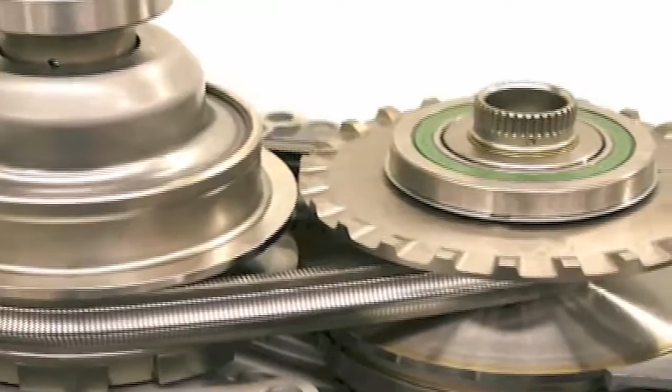CVT belt to pulley clamping. The key to understanding how a CVT works is by reviewing how the chain and cone pulley react with each other. All CVTs have one weak spot, the contact point. This is where there is a tendency for the whole transmission to slip, grind and sustain damage. Incredibly enough, this is not where CVTs fail the most, but more on that later.

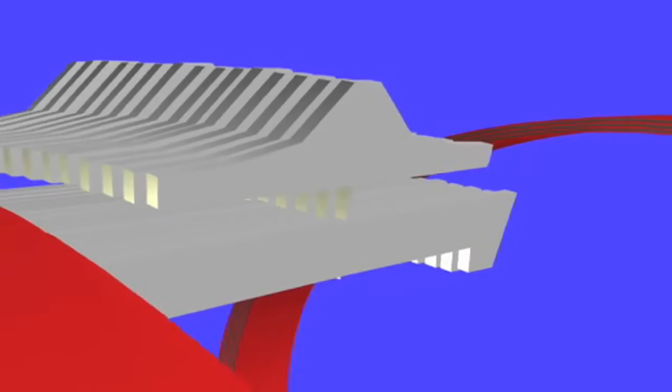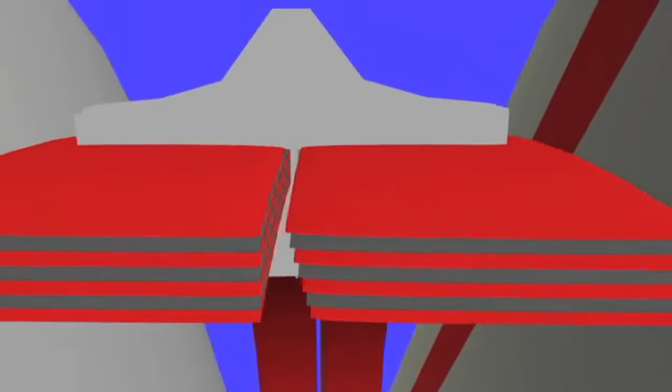The CVT belt is composed of two groups of metal rings, each of 7 to 12 rings, and a few hundred special metal links. It is these links, the ones with direct contact with the cone pulleys, or variators as they're called by the manufacturer. For good clamping force, the CVT needs a specific transmission fluid. To neglect this fact is to ask for trouble, as the CVT will get damaged due to slipping and grinding between the belt links and the cones.

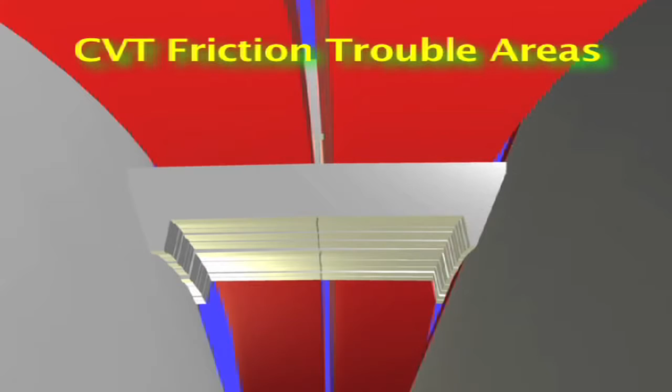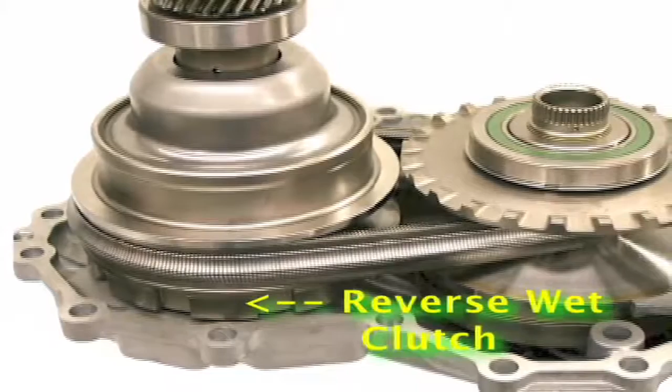The CVT also has a few wet clutches, like a regular automatic transmission, needed for reverse gear. All pressures are regulated by a series of pressure control solenoids, pressure sensors, and a TCM pulse width modulated control signal. Unlike the Honda CVT, most CVTs use a torque converter. Honda does away with the converter, and uses clutches instead. The purpose of the torque converter is to allow constant acceleration from a standstill, by providing a hydraulic disengagement from the engine. After driving away from full stop, the torque converter clutch applies very early, usually at about 14 miles per hour.

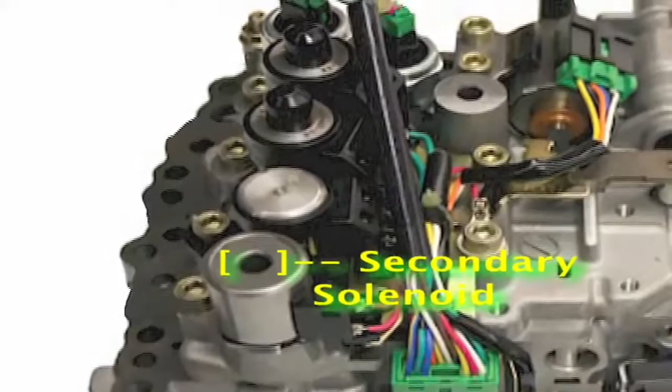The secondary variator pressure control solenoid controls the position of the secondary variator pressure control valve. This valve regulates the release of fluid to the oil pan from the secondary variator or pulley during movement from high to low gear ratio. Since the CVT depends mostly on the secondary variator to provide the necessary clamping force on the belt, it's very important for this solenoid and valve assembly to work properly. A fault with the secondary pressure control solenoid will send the CVT into limp-in mode, precisely so as not to cause damage between the belt links and smooth cone surface.

The following DTCs will set if there's a failure in the secondary variator circuit or valve: DTC P0776, P0777, P0966, and P0967. The TCM will look at the secondary variator pressure sensor value, to determine if the solenoid is operating properly. If the actual values and target value pressures don't match, a DTC will set.

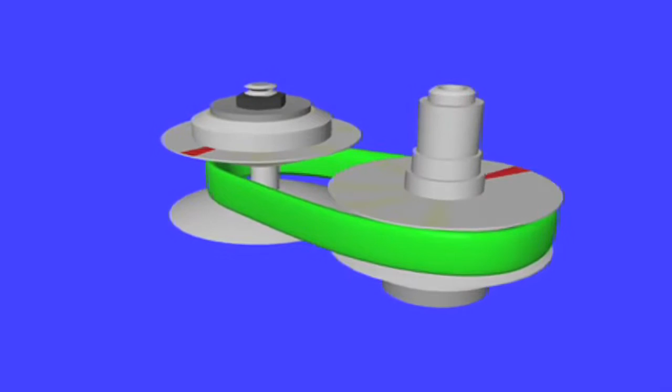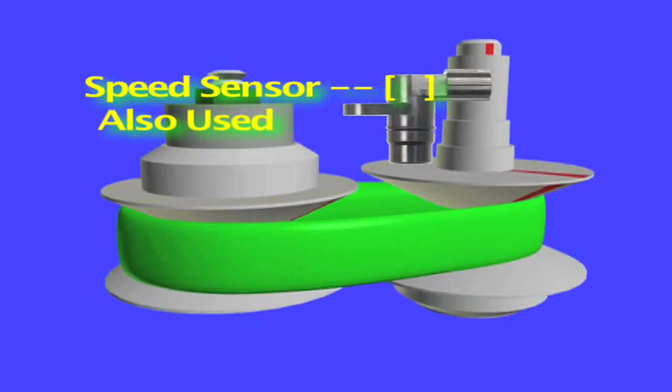Keep in mind that CVTs work by pushing on the belt, and the right tension on it is of absolute importance. How does the TCM know the CVT belt tension? Well, very easy, by monitoring the variator pressure sensor, and comparing this value to a pre-programmed lookup table. In other words, there's complete computer control over the hydraulic pressure, and hence, over the CVT belt to pulley clamping force.